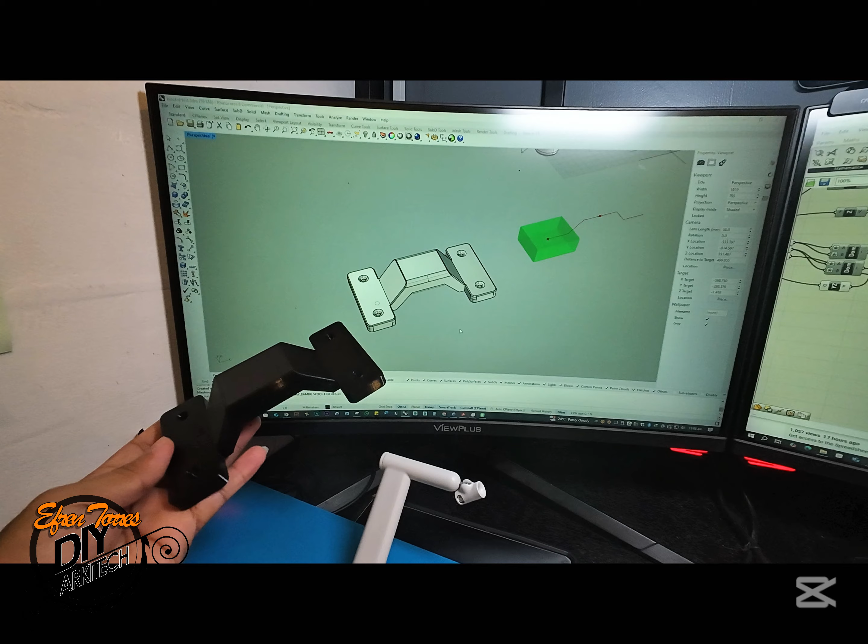Digital manufacturing - yan, ginawa ko sa computer, and then ito na yung kinalabasan in actual. So ang smooth ng quality, though iti-testing ko pa to, so i-try natin ito, attach itong bracket.

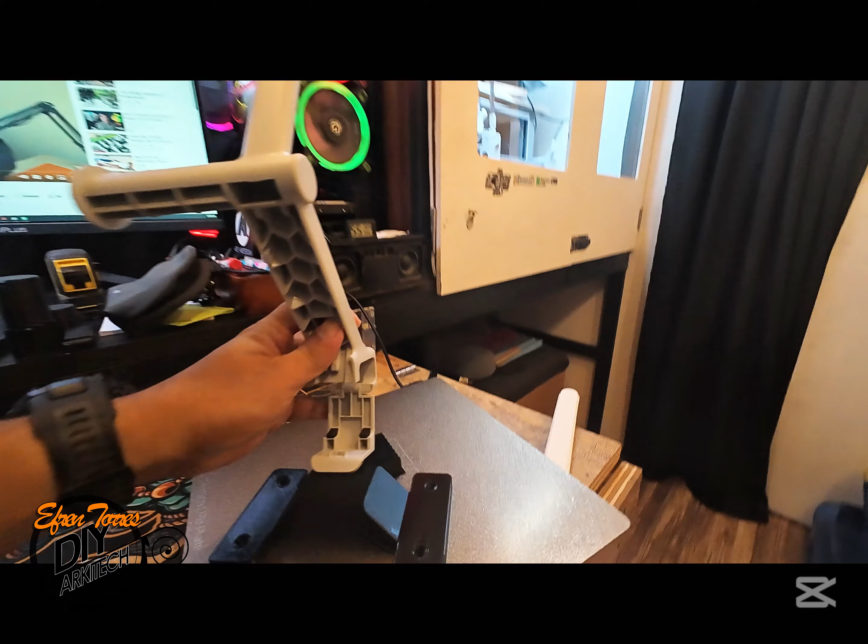I'll try to do it with one hand, just like this. Kailangan ko pa tong i-screw, and I don't know if this one will fit. Yan. Oh yeah, yan guys. Nice, so saktong sakto, no?

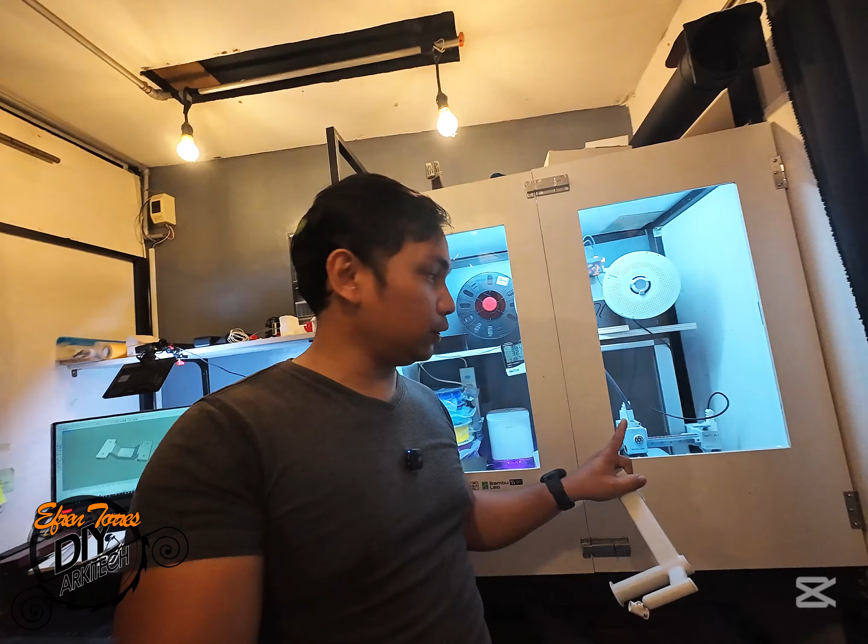Yung ipapakita ko ngayon is itong nasa likod, which is this one. This one is a 3D printer. So naka-enclose siya. In-enclose ko muna bago ko siya buksan mamaya kasi nagsa-start ako ng printing, at may gagawin ako para dito sa spool holder na to.

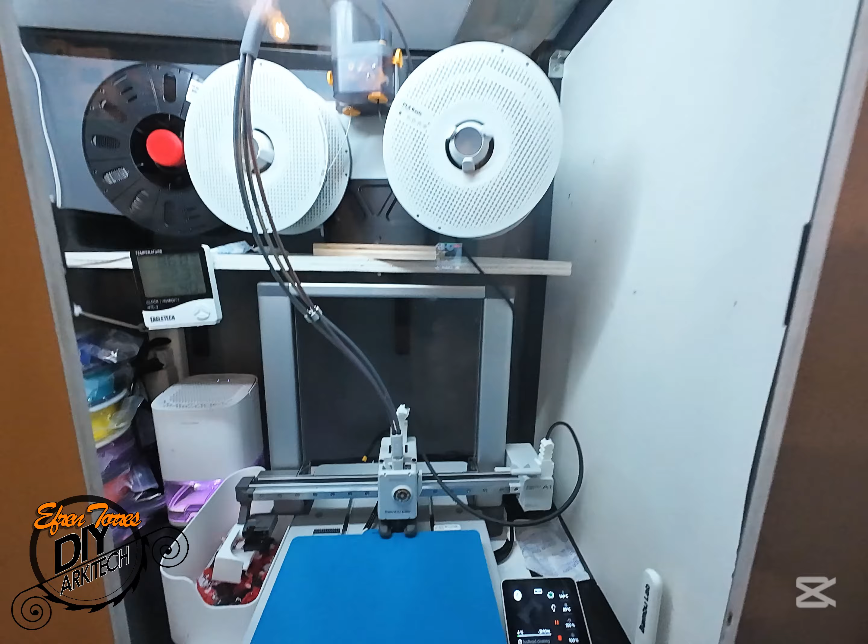So CNC machine, which stands for computer numerical control, so it's a computer controlled machine. So this one is the CNC, or to be exact, this one is the 3D printer.

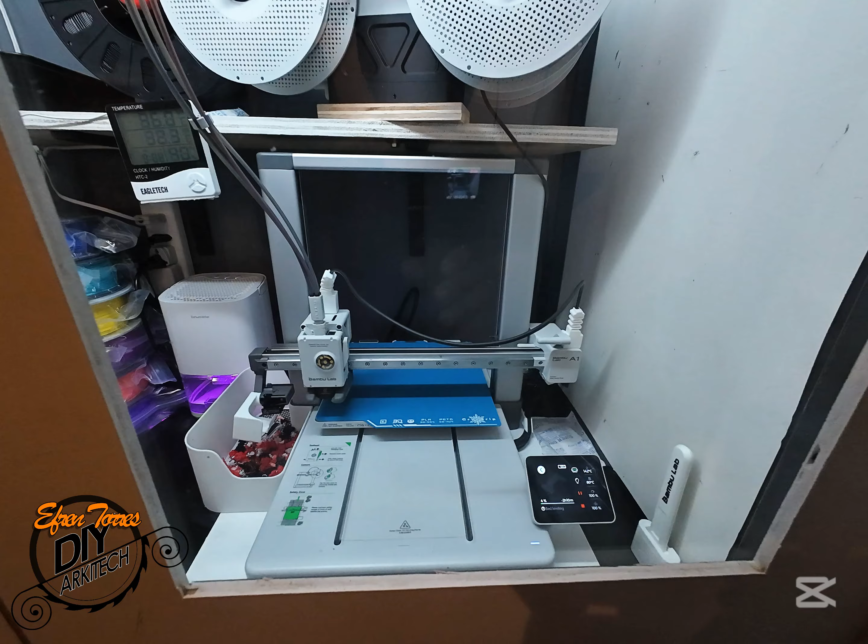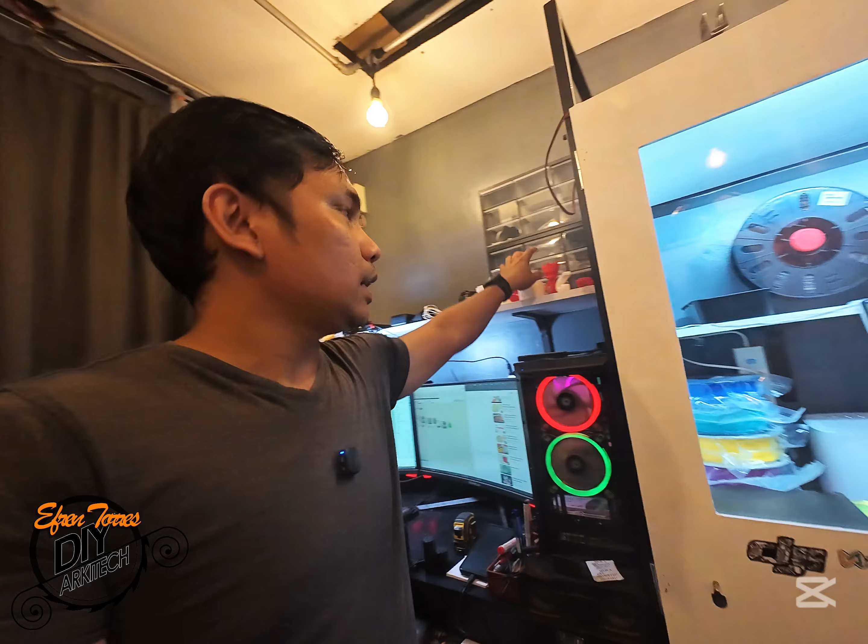I'm very excited for this particular model kasi this one is bago lang. I've been playing with this one for maybe 2 weeks, and I'm very happy na kinuha ko to kasi for a very long time gusto ko na talaga kumuha ng 3D printer, but that time hindi pa siya ganito kabilis na mag-print. So 3D printer is machine na mag-print ng anything na 3D na ginawa mo sa yung computer.

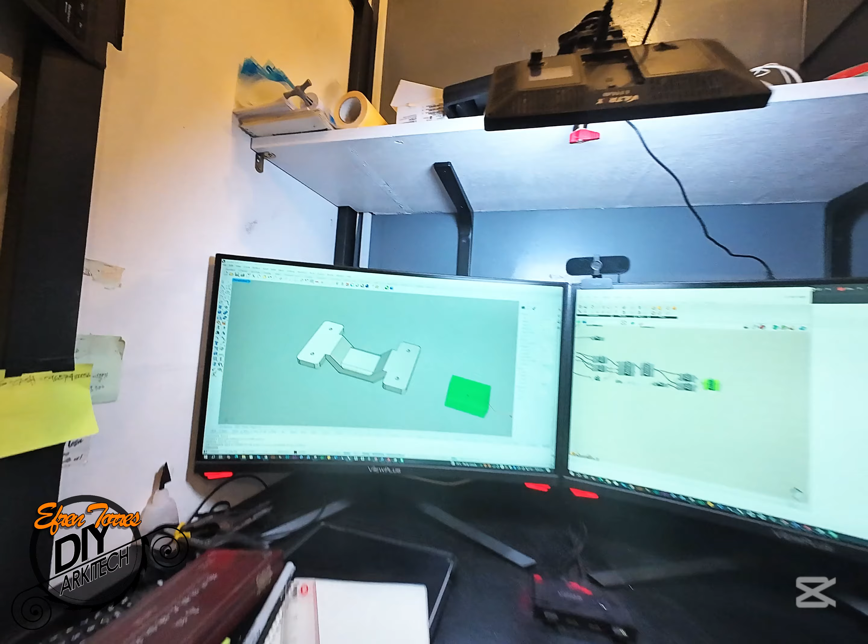As you can see, nag-start ang printing ng ating machine. And as you can see also, this is the one that I'm talking about, na yung design mo from your computer, which is, as you can see right now, I'm using Rhino 3D or Rhinoceros 3D.

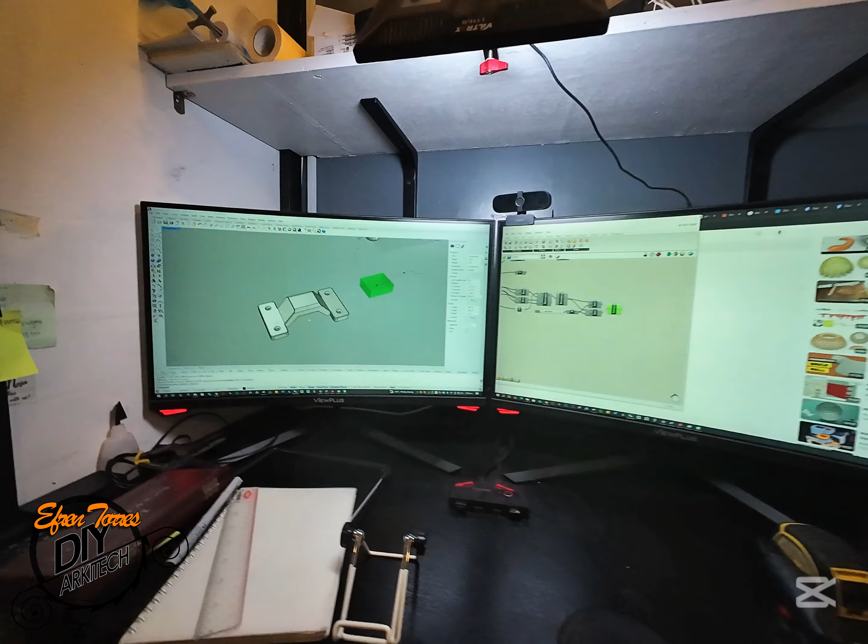So this one is a bracket na gagamitin ko for the spool holder, na i-mount ko lang siya, or freestanding spool holder. So yeah, anything na gagawin mo in the computer which is 3D, lahat ng nasa imagination mo is kaya mo na siyang gawin.

Parang hindi na ikaw yung gagawa ng gusto mong gawin, o kumbaga kung ano yung nandito sa computer, yan yung lalabas. Kagaya lang siya ng parang Word o document na magta-type ka, whatever na nasa computer, whatever na nasa screen, picture, text, or anything, pag piprint mo siya lalabas. So dito is it's in 3D.

So though this machine that I have na Bambu Lab A1, it has the capability to use 4 colors at the same time to create a 3D model. But for this particular project I'm just using single color.

Yung ginagamit ko for this particular purpose is because this one is for structural and it will carry some loads from, though it's just 1 kilogram.

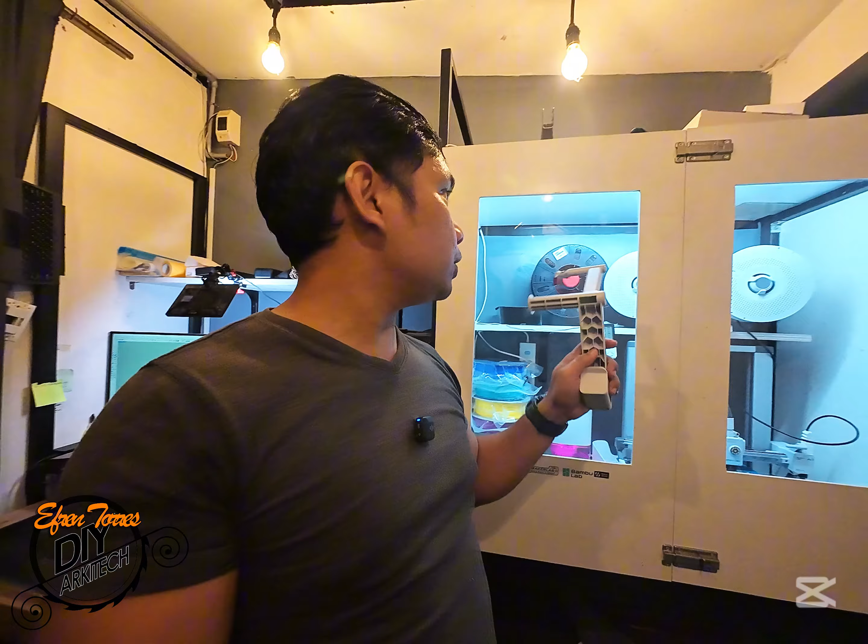The filament, I'm using PETG, so I'm also testing this particular PETG roll that I have. Bago lang yan, nabili ko from Shopee.

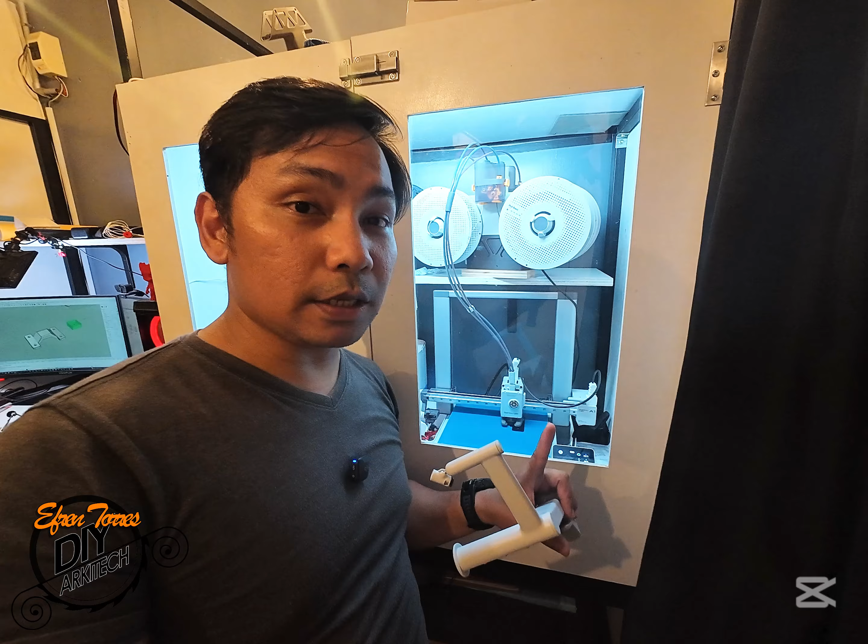And also yung 3D printer na to is also from Shopee, so kailangan ko siyang testingan ng I think matagal-tagal pa para at least ano ko siya, parang mahimay ko ba or ma-perfect ko yung paggamit nito, kasi bago lang ako sa ganitong field.

Though matagal na ako sa CNC machine, which is cutting. This one is additive manufacturing. Para siyang glue gun na nagre-create ng 3D.

So this particular spool holder will carry this particular spool. This one ilagay ko lang siya sa box. So this one ilalagay ko siya freestanding or maybe naka-attach siya sa ceiling or anywhere na pwede ko siyang ilagay.

Yan yung ginagawa ng 3D printer ngayon na piniprint niya. So yeah, I'm very excited for this particular machine.

I'm hoping to create a lot of project using this one, and I have one particular project soon, maybe in a few days, na gagawin for my son's birthday. Magagawa kami ng parang giveaway sa kanyang mga kaklase na para mga initial, mga name tags kumbaga.

So yeah, stay tuned for that particular project in the future, and we'll just wait for this particular project na matapos, and then ipapakita ko kung ano yung gamit niya pag natapos na.

This one will take 2 hours kasi ginamit ko yung na setting is for strength. So as you can see, it's still working.

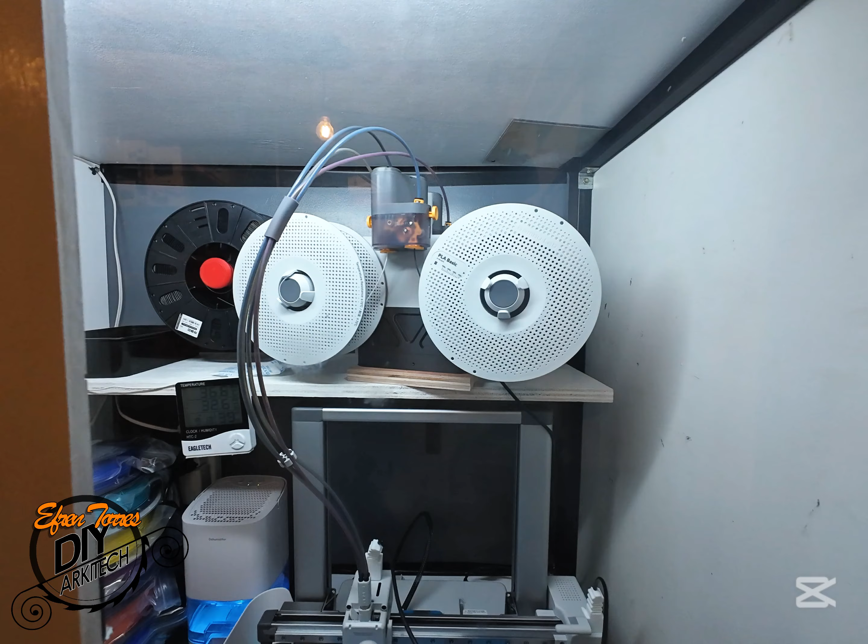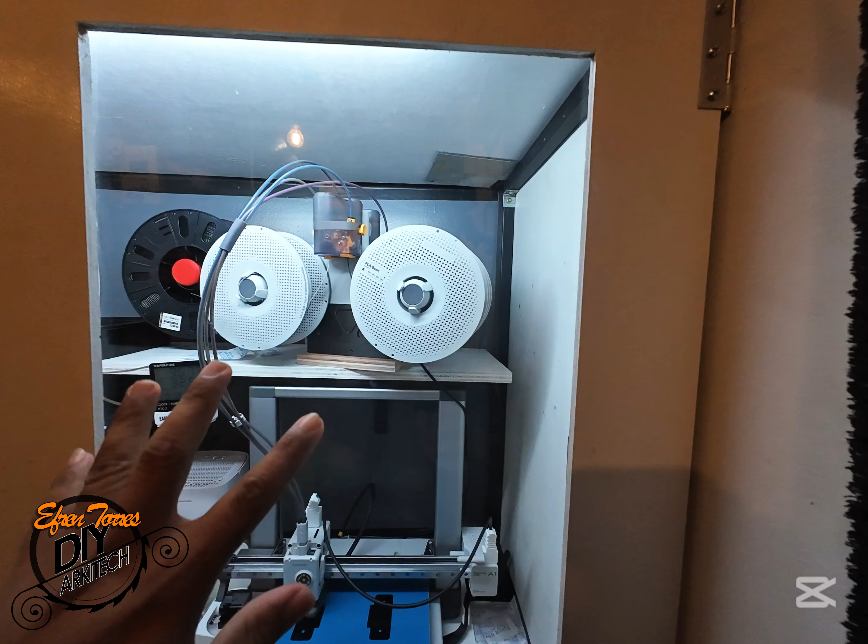This particular machine has its spool holder and AMS, or automatic material system, ng Bambu Lab. Yung pag-start ko nito, bumili ako ng 4 na Bambu Lab PLA Basic. Yan yung basic niya, kanyang filament.

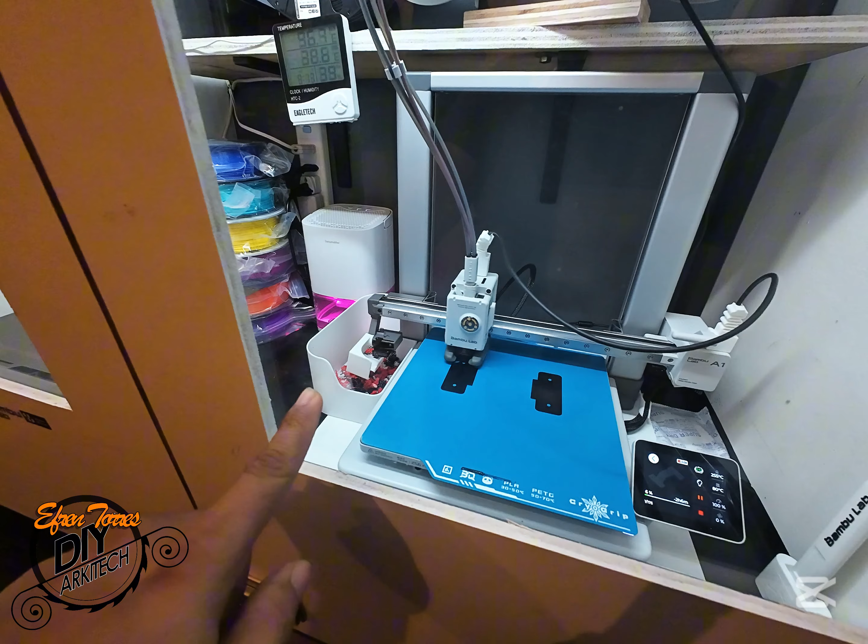I've been practicing, and as you can see sa side, meron siyang mga poop o mga drop ng filament na parang waste na siya kumbaga. Tawag dyan is

poop chute, yung mga poop na fini-fill out ng machine when changing filaments. For this particular layer, medyo mahina ito kasi doing the starting pa. Lalakas o bibilis yan pag mataas na ang layer. Maghintay muna tayo.

This is the 3D printer enclosure that I built a few weeks back. Gusto ko kasi na secure yung machine, di masyadong maalikabukan. And yeah, this one is operable. I-open natin.

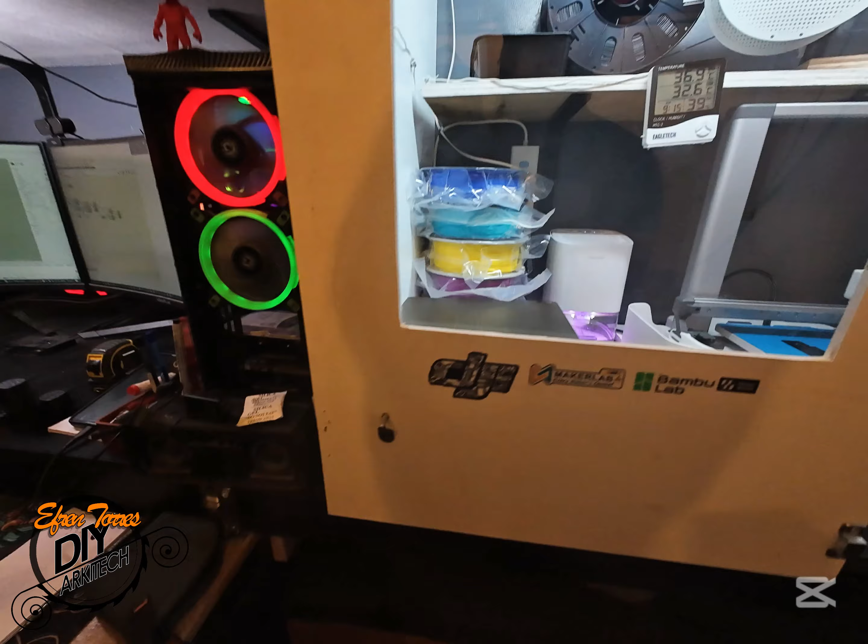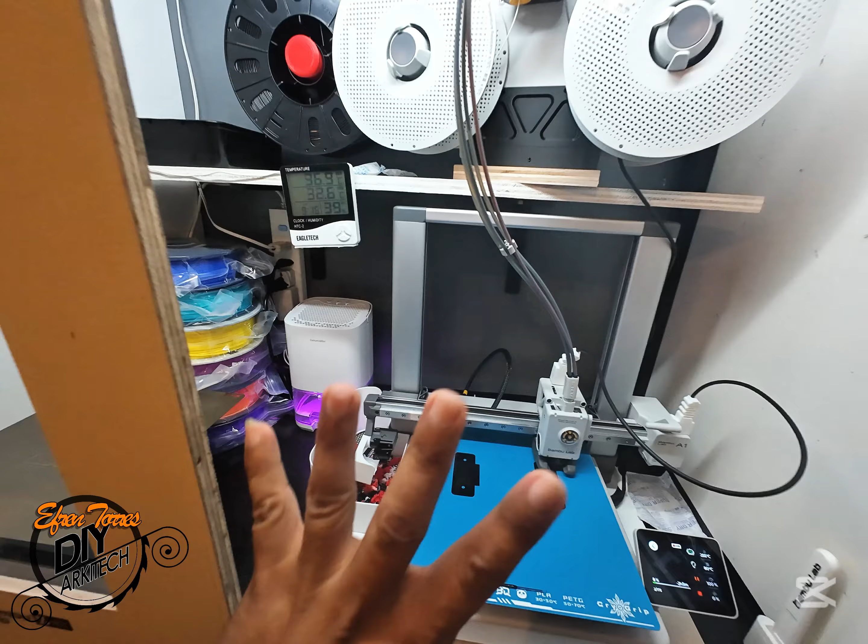Naglagay din ako ng hygrometer. Relative humidity makikita nyo nasa 39, at dito sa labas ng aking studio is 58, so malaki yung difference. Ganun din yung temperature sa loob at sa labas: 36 dyan sa loob ng enclosure box at 32 dito sa loob ng studio.

May dehumidifier din ako nilagay kasi yung PETG material ay kinda hygroscopic, medyo nag-absorb siya ng moisture. As you can see, pretty much working siya kasi 40 na siya, at dito sa labas is 50 plus. Nandyan din yung mga ibang color ng filament na gagamitin ko for future projects.

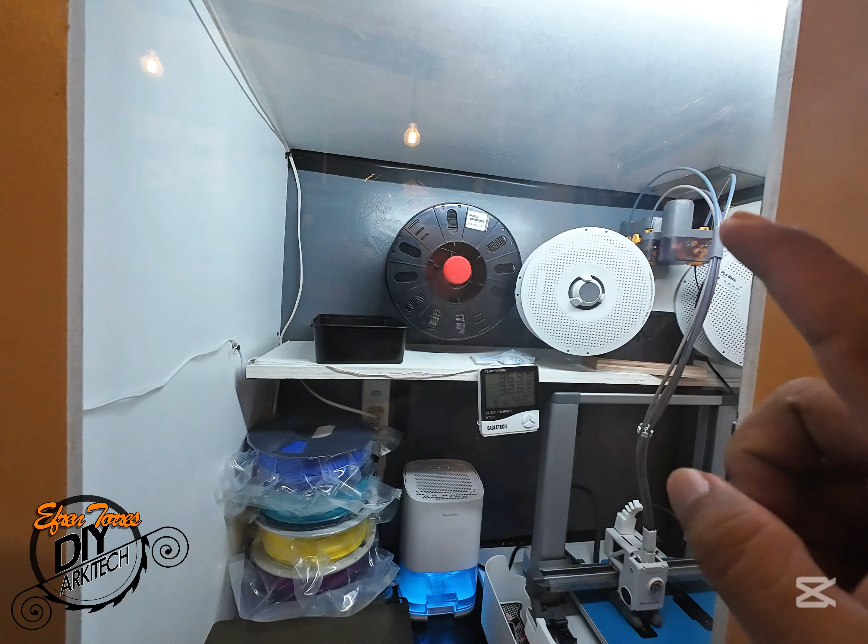For example, this coming few days, gagawa ako ng mga name tags na giveaway namin sa mga kaklase ng aking son. Ang filament na ginagamit ko is black na PETG kasi gusto ko ng a little bit more stronger na material, at finid ko siya dito sa AMS.

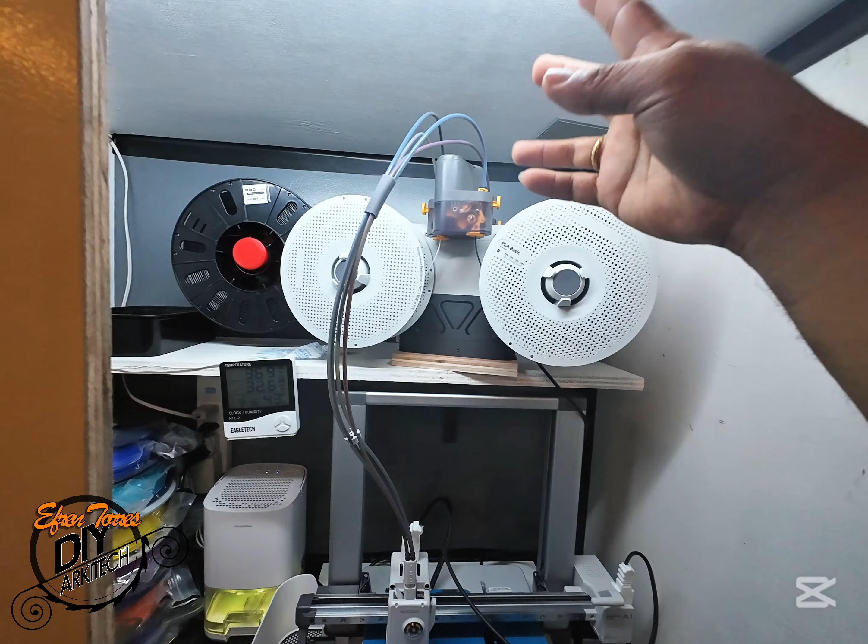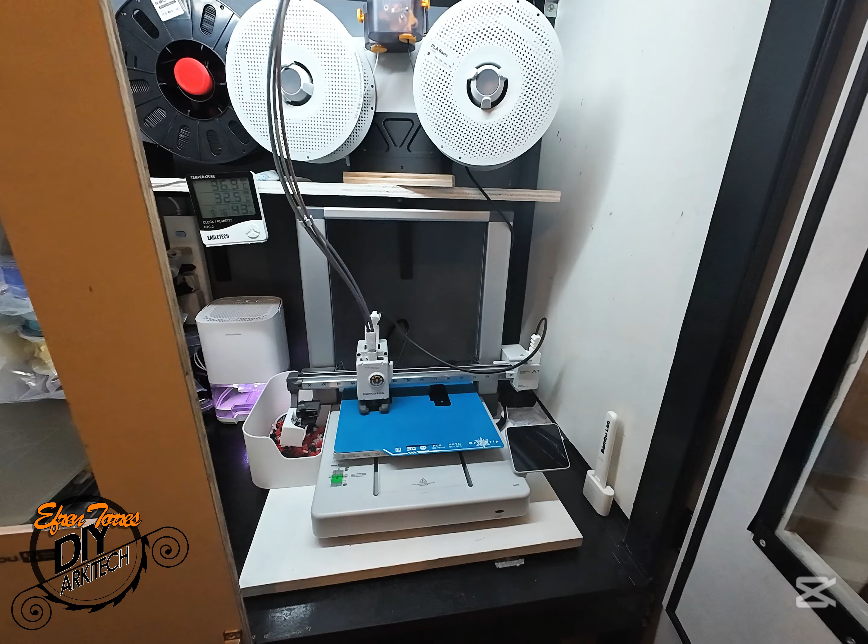Automatic na siyang nag-feed dito sa machine, so we're just going to wait for the print na magkakaroon na ng itsura.

Kita-kita na lang tayo pag medyo may mukha na. For now, base pa muna yung piniprint niya, so let's wait for a minute or two.

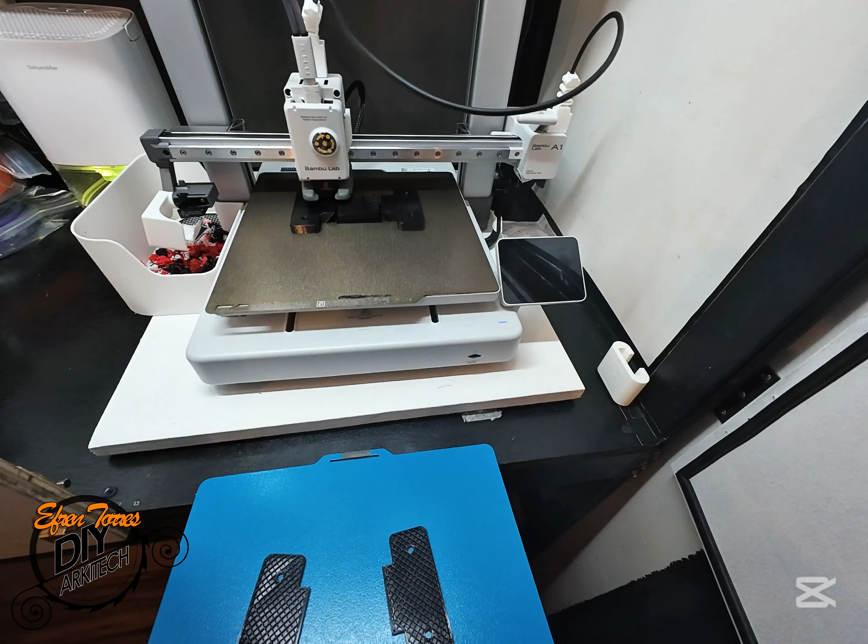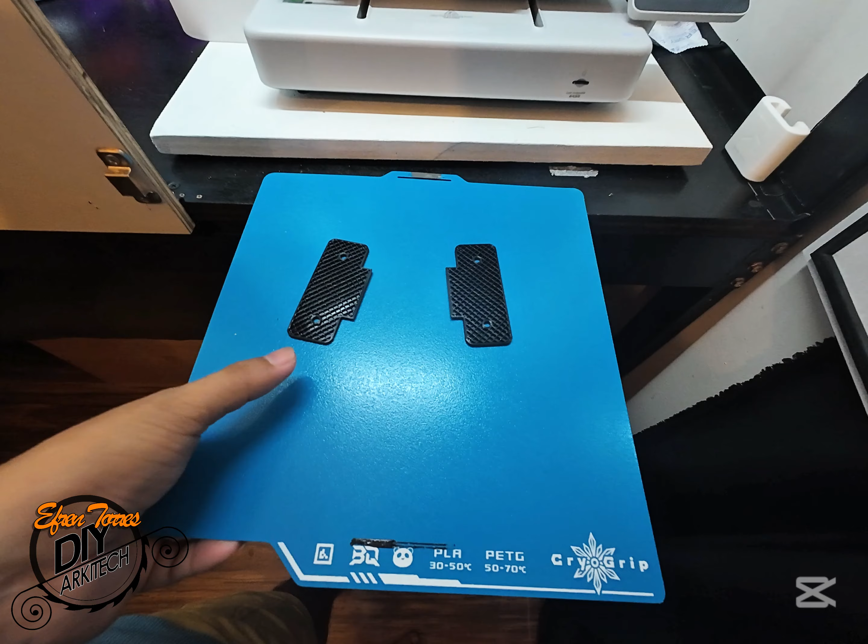Hey guys, so this is the update. As you can see, iba na yung plate, dati blue, ngayon iba na kasi nagkamali ako ng pag-print. Tinanggal ko na to. Magkabilaan lang kasi nakalimutan ko yung sa gitna.

This one has a parang bridge sa design, kaya nakalimutan ko maglagay ng support. Ngayon may support na dyan sa gitna. Na-finish na yung bawat gilid, yung parang screw holes at yung bracket na yan.

Continue na lang yan for the top portion, yung parang may bridge, and as you can see sa gitna, di na siya hollow kagaya ng una kong print. Maghihintay na lang tayo na matapos yan. See you later.

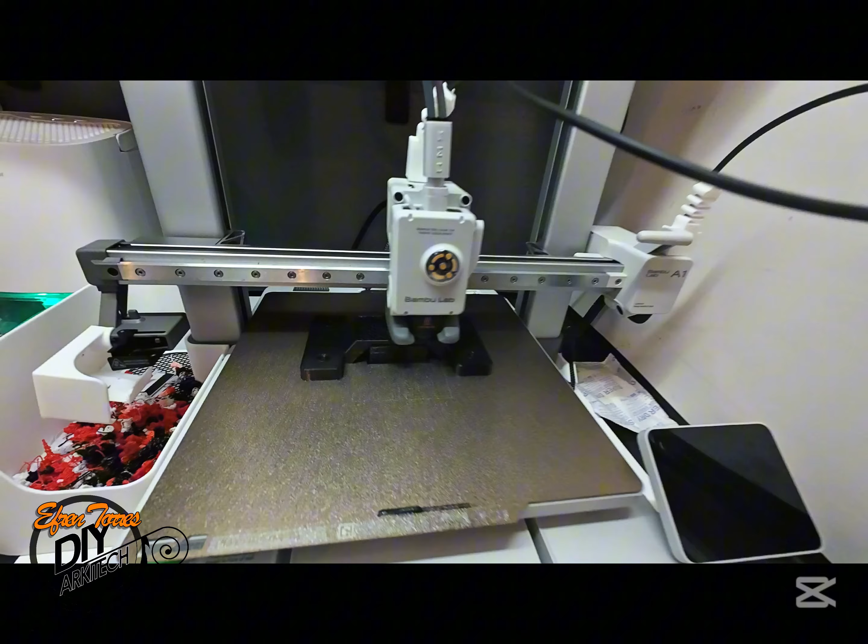As you can see, nagsa-start na siya mag-build ng top portion, nagbi-bridge, and you can also see the support. Hintayin na lang natin na matapos, and that's the update.

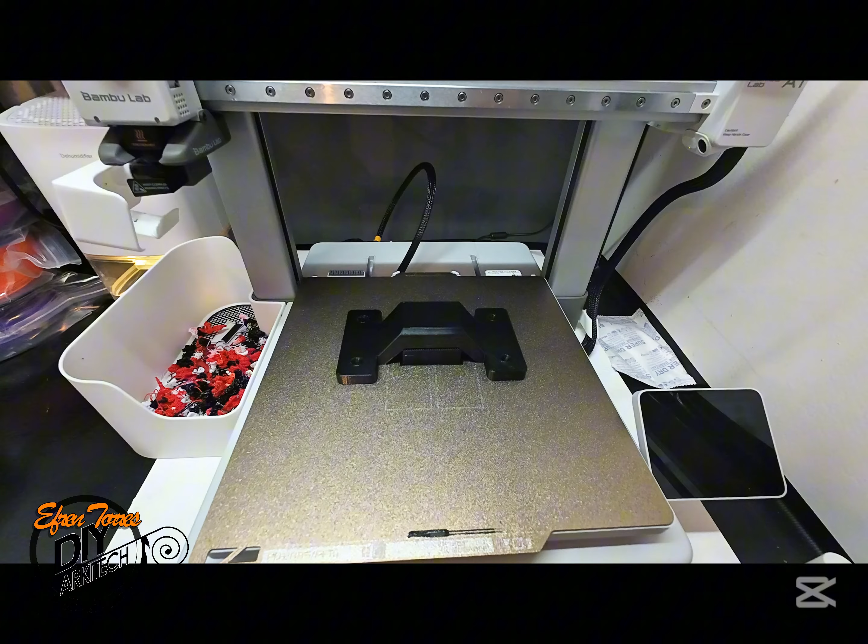Hey guys, I think this one is already done. As you can hear, 2 hours and 29 minutes, 61 grams. Okay, done, this one is printed in PETG. This plate is hot, and yeah, woo.

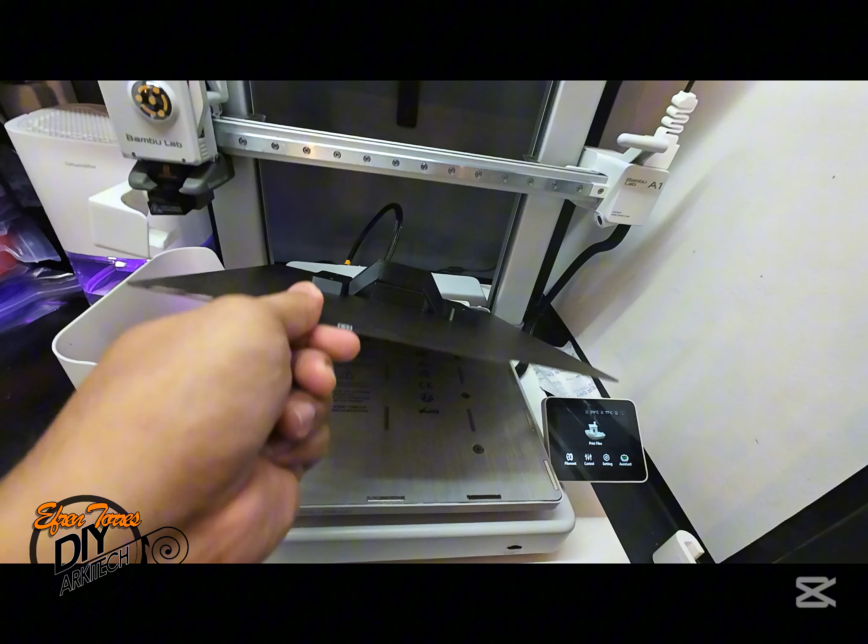As you can see, this one is really good. I can see some stringing, but then the print is very shiny. We'll put that there, and we'll close this one. We will wait for this to cool down dahil mainit pa.

I-attach natin to dito, maghintay muna tayo, ang init. Okay, I think this one is already cold, so pwede na siya. Madali lang, natanggal na rin yung support. Separate na siya automatic. So yeah, this one is the bracket.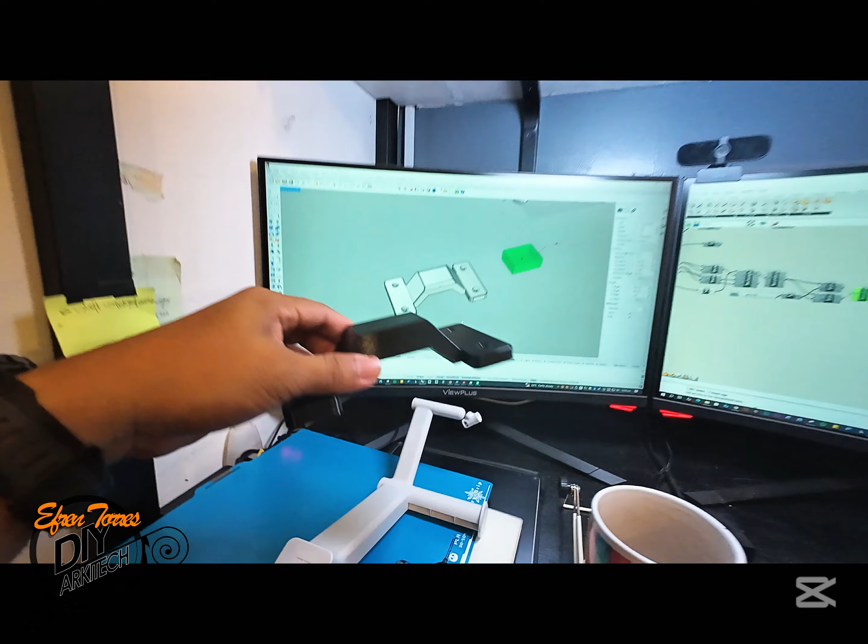I-open ko yung computer ko. As you can see, 40 millimeter by 40.5 by 20 millimeter. Kinuha ko yung measurement ng bracket nito.

This one will be attached using these holes here, and yung spool holder o yung spool ng filament is going to be here. Kailangan ko pa itong i-attach o hanapan ng base para at least freestanding siya. Kaya ito lang yung priname ko para hindi gaano kakain ng malaking area, o yung filament ay hindi magastos. Saktong sakto siya for this particular project.